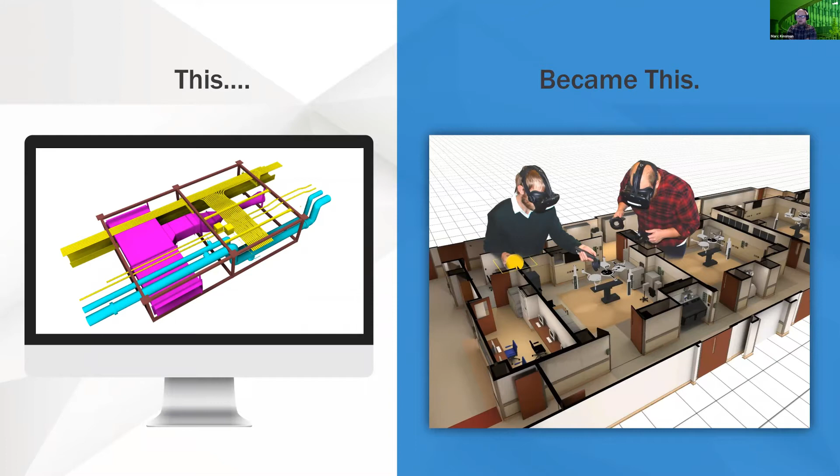Again, if we look in contrast to the old time, you could zoom around, you could fly around, sure. But many times I'd find myself looking in there and I'd try to be routing some sort of pipe or duct or something, and say, oh well, maybe we'll be able to squeeze it through this gap between one or two other things. And the rest of the team would look at me and say, are you kidding me? Measure that, use the actual tool—and it would be a sixteenth of an inch, half an inch maybe, and I'm trying to get something much larger through there. So you lose that sense of scale. But when you're in VR and everything's true 3D, it's pretty hard to lose that, even when you're seeing it at different sizes. And it really changes the way that we perceive our virtual world, and we can get a lot of value out of that.

So what I wanted to do first, as I said, is get some of the terminology out of the way and level set here on what's big and what's important. The different types of headsets has been confusing for some people, as I might recommend something or another, or work with a project team. There's different things you can buy, and there's different things that they're good for. And there's not one that's strictly better than all the others, although I think it's getting close.

So the first one that I like to talk about is 3-degree-of-freedom headsets. These are pretty much the early VR headsets that are around. A lot of people might have seen these—the Samsung Gear VR or the Google Cardboard—and they would often use your phone, and you put it in. That 3 degree of freedom is 3 axes of rotation.

So you can look left to right, up and down, or tilt your head sometimes, and you can stay in one place but look around you, and that can be pretty useful. But if you try to do more than that, you can get pretty motion sick.

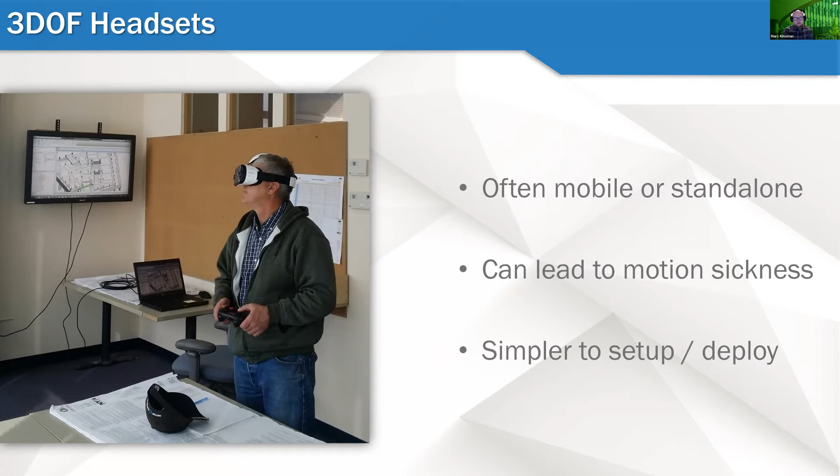But there is one technology that really works with that very well, and I never want to discount these: photospheres. A photosphere, or 360 photo, is an image taken from one location but all the way around it. You can render these or take them with cameras, and at one point you can look anywhere. That works really well with a technology that only lets you look but doesn't let you walk. It can become pretty immersive and useful. Then if you want to go somewhere else, you just have another photosphere and teleport to that location, hopping and skipping around to look at a space.

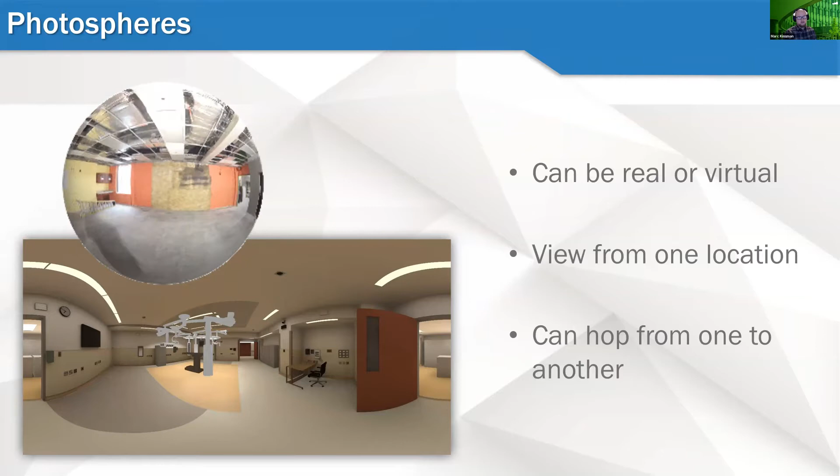It's very low tech, very easy to produce, and you can move pretty quick with these and get some good results. The next level, though, that I find a little bit more exciting for a lot of people is 6 degree of freedom headsets.

The extra 3 degrees of freedom we're adding in here are the positional ones: can we move forward and back, can we move left to right, can we move up and down, as well as all our different rotations?

For the longest time, this was pretty much PC based. You'd have to have a really powerful PC, lots of cables and cords, but more stuff's coming out right now, like the Oculus Quest, that while less powerful, can still do a lot of the 6 degree of freedom things.

Within that, you're also going to typically have some controllers, so you can see where your hands are as well as move your head around. It's a very immersive tool.

We're kind of striding in 2 ways to do this right now. The first way one might use a 6 degree of freedom headset, especially in the construction industry, is to use what I call a one-click solution. There's a couple different ones out there, like Iris VR, the Wild, but the idea is you might be in Revit or some other authoring tool, you click one button and all of a sudden you can put on your VR headset and look around, explore a little bit. Typically these are software as a service, so you have to pay for them, and you can move around, and they do offer a good sense of presence.

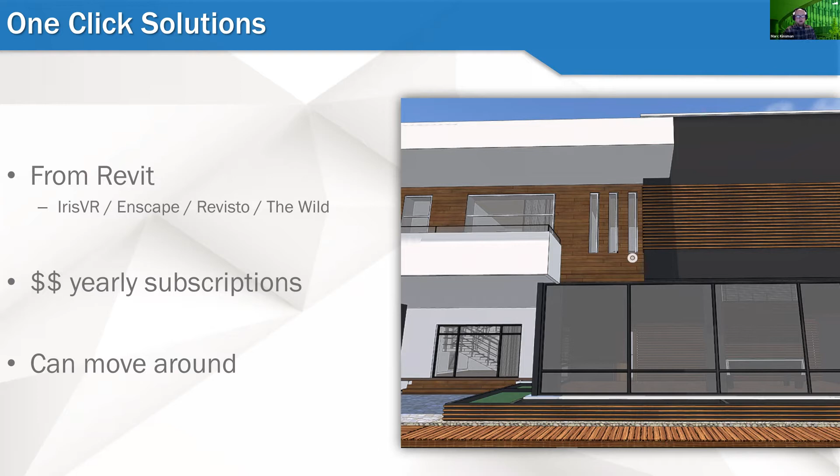Now, it's not going to be super high fidelity in most cases because it's just taking what you have in Revit, and it might not be able to handle a lot, but it's a really easy way to get in and a really good way to work with your teams, your owners, your designers, and figure out some problems you might have.

If you find those to be too limiting, you also have the option of going to a game engine, building it full from scratch. That's what my department does, that's kind of how we got ourselves started. The reason for this is absolutely anything's possible. You're making a video game from the ground up, but it takes a lot of skills, a lot of programming effort, a lot of good modeling effort.

It's a very different style of modeling than we do in the construction industry. It's mesh modeling as opposed to CAD modeling. But the results are amazing, and you can do some really cool stuff. We'll talk about some of those later and what I've been working on with that.

So there's 2 categories of augmented reality. There's video see-through AR, the type you're going to have on your phone. You're going to look at your phone, see through the camera of your phone. It's going to be some sort of video mode, and then you're going to layer things on top of that. There's a bunch of different ways to do it, and it can be pretty easy, but also doesn't always feel that immersive because you're really looking at a video, and how do you tell that that's any different than if someone just took a video of something and edited it? What makes that realistic and real time?

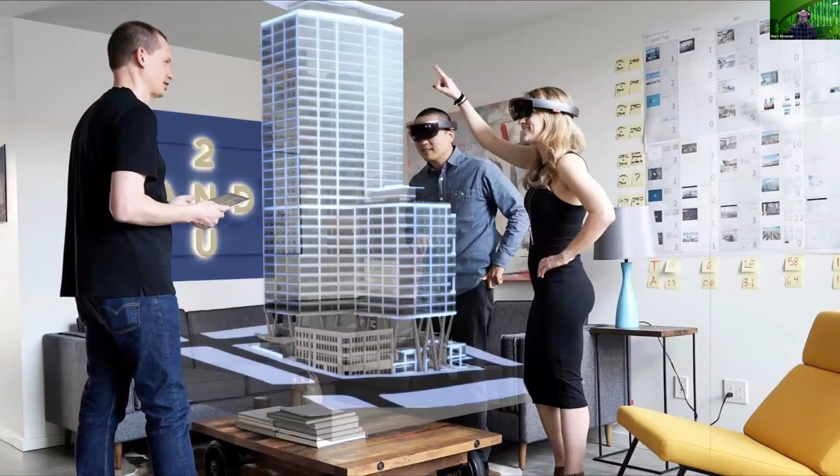But lately, we've kind of moved more towards this. I do have to give a call out - this image was made by Skanska and Studio 216, so I'm just borrowing it from them. But I think it really does set the vision for what the use of this technology can be, especially when you're starting to play with AR.

It's this normal environment - you might be talking about something, but you need to look a little bit more in depth into the models. You need to be able to jump in there in some way, and you can just bring it up and work through it. This leads to this gradual paradigm shift I've been seeing in the industry in the uses of extended reality.

When it first came out, everyone was really excited, of course, but the actual use cases were pretty thin. Almost all of them were architectural visualization - can we bring someone in to walk around and look around? It'd be very neat, pretty inspiring to see stuff. It could be at different levels of fidelity, but ultimately not super useful or at least reusable. Someone will go in and say, oh, now I understand the space, cool, and I'm gonna dip out of here because I have other stuff to do. So you get that sense of presence of standing there, but once you get that, there's not really much value from repeating that.

Where we're seeing the industry start to move, and some of the vendors and more advanced practitioners, is towards a collaboration movement. So it's more than just, hey, can I move an object around, but really, can I get multiple people in the same space working together, having these important deep conversations, being able to facilitate those conversations, other tools and abilities for that, and really having that space respond to multiple people in there doing the work that they need to do. This has been pretty exciting as an idea, and I think I'm going to use a bit of this as a jumping point to show the history of what I've done with VR and how that's influenced things. But just always be thinking, if you're going to start to use VR or AR or talk about something with it, what are the use cases? Is it just a cool, neat tool to look at stuff, or can you do more with it?

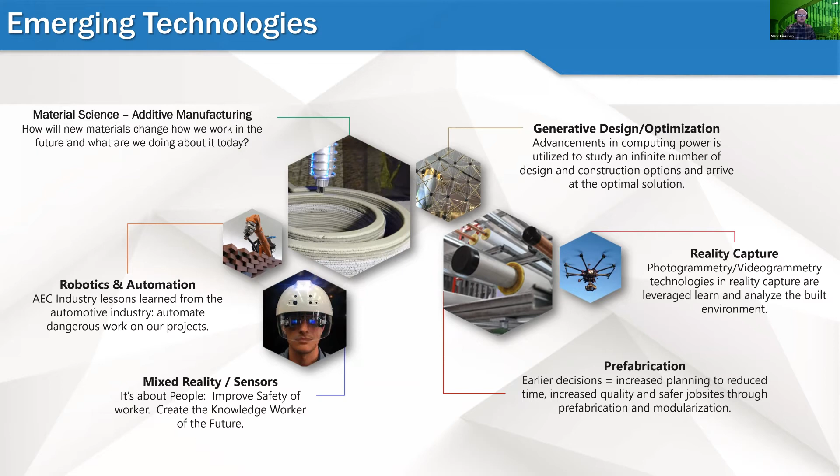But I'm just going to jump straight into some actual concrete examples of what we've done with these tools, and a bit of how that's evolved over time, just to give people ideas, because I think we often get stuck in, well, I can use this to look at it, but what are further tools? How could I use this to make money? How can I use this to make decisions?

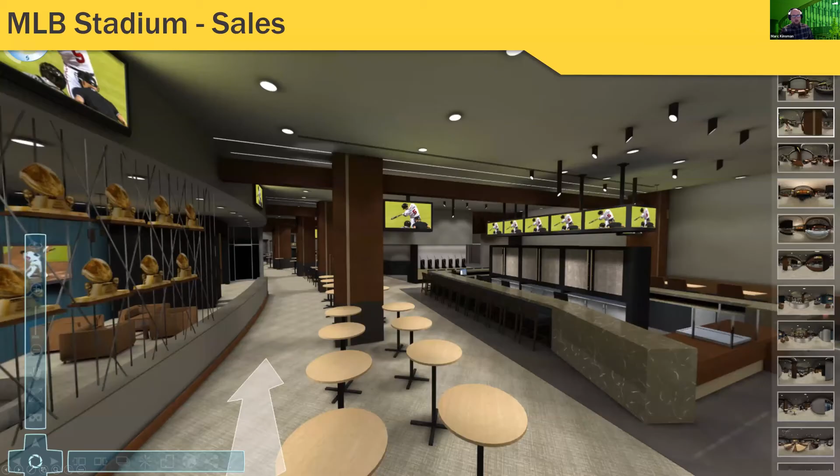So very early on in our career with this, we did some stuff with 360 photos. As I said, that was kind of that early stage where you can look around and start to see things, and then teleport to different areas. So we worked with some Major League Baseball stadiums and helped them build a tool that they could use in their sales centers to try to sell these suite spaces early. It worked pretty well - people were pretty excited about it.

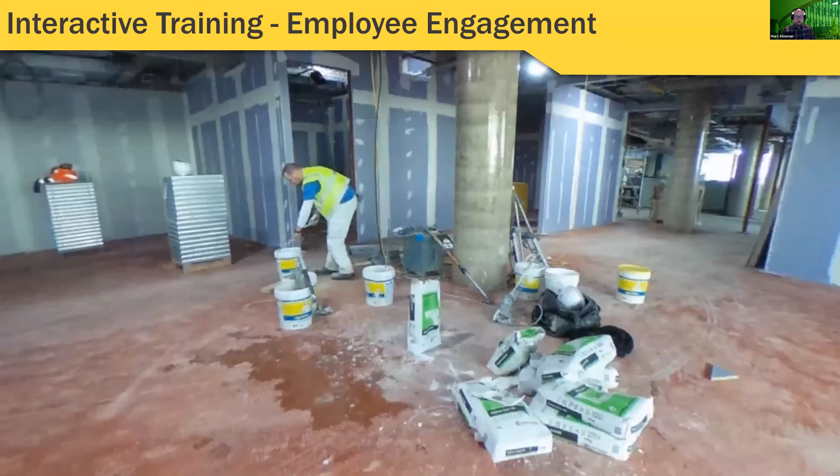But then we turned inward and started looking at how we might use that on our own job sites. So we developed a safety tool where we were asked to identify job site hazards. The goal here is, yes, it's easy for someone to use the tool, but more importantly, it's easy to create these new quizzes and tests. We actually have a web-based portion as well to create these, so it's very easy to jump in, do some quick learning on something, and then move on to the next step. I think this is going to show our little platform for creating new quizzes.

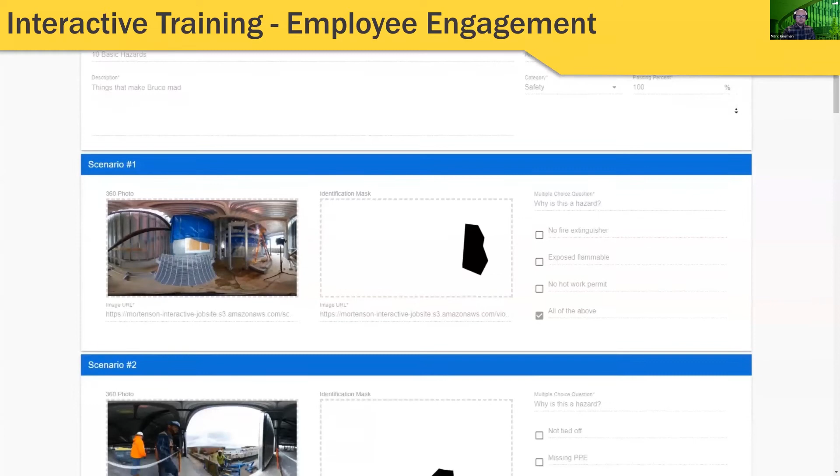And so this is more recent. As I said, we don't want to forget that 360 photos and 3 degree of freedom headsets are out there. They can be used, but it's a very specific use case that you want to have.

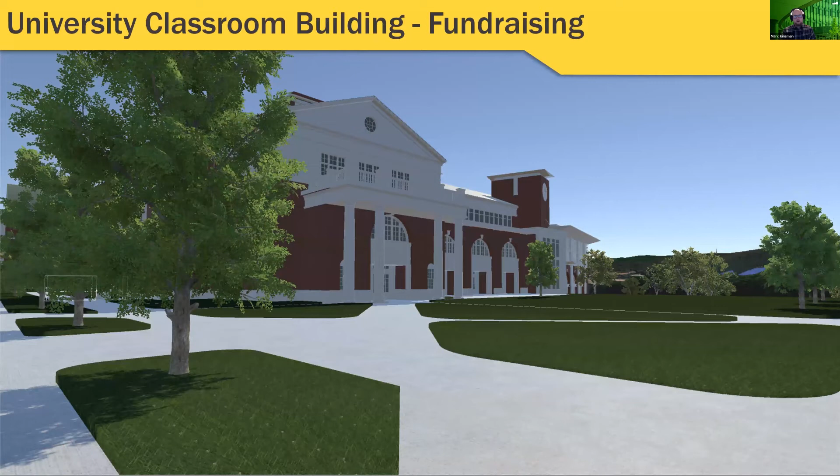Some of the things that are probably more similar to one-click, we haven't really done too much recently, but this is kind of the level of fidelity you might be able to see in most one-click solutions. And even with that, you could use it for different things. So we've worked with a university at one point and took some of the early models in there, brought them into VR really quickly, and they used that for fundraising. They actually would bring that to potential donors and say, hey, how neat is this building? Wouldn't it be cool if that building had your name on the front of it? And it only takes X amount of dollars to make that happen. So that's been a pretty valuable tool.

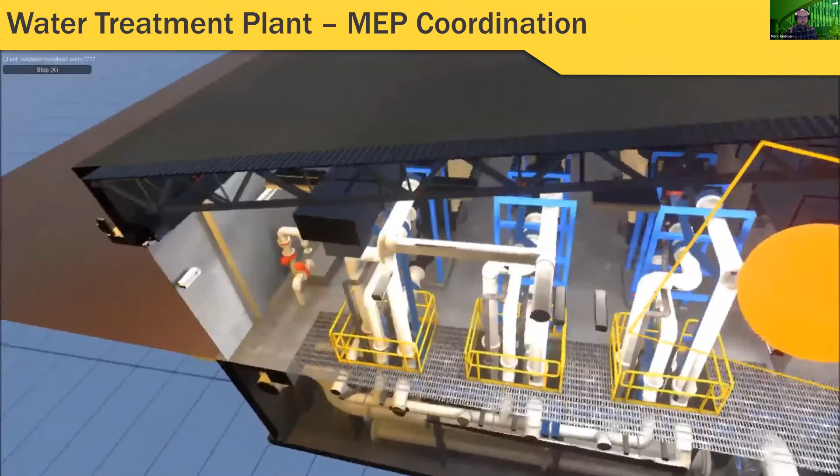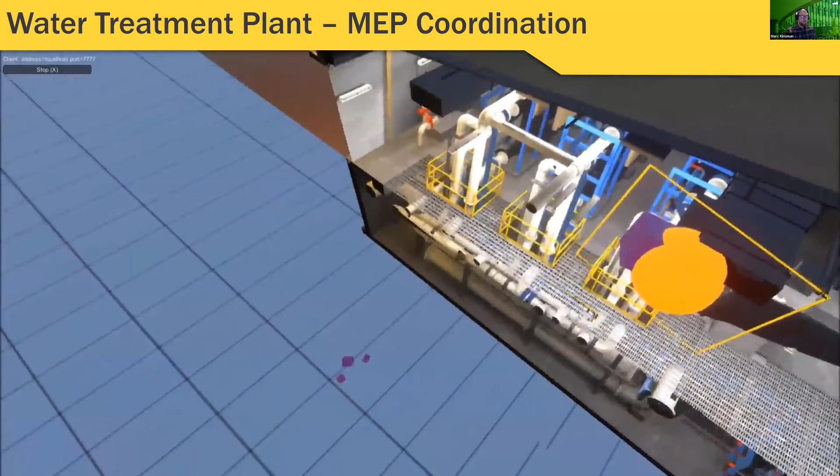This one's a little bit more basic, but it's on the other side of the building spectrum than we've been talking about recently, which is working with facilities. How with facilities can you get them in ahead of time? Can you get them to understand their new space? There's this huge pressure once a building's coming online to start doing your maintenance early, your preventative checks and all that. So going through and familiarizing the team with that, getting them to understand how things flow, tracking down different systems, looking at valve locations - this is a really easy way to do that. Right now, a lot of teams would probably be using something like Navisworks, but it's just a different experience when you can actually have the user stand in it and see how they feel with it.

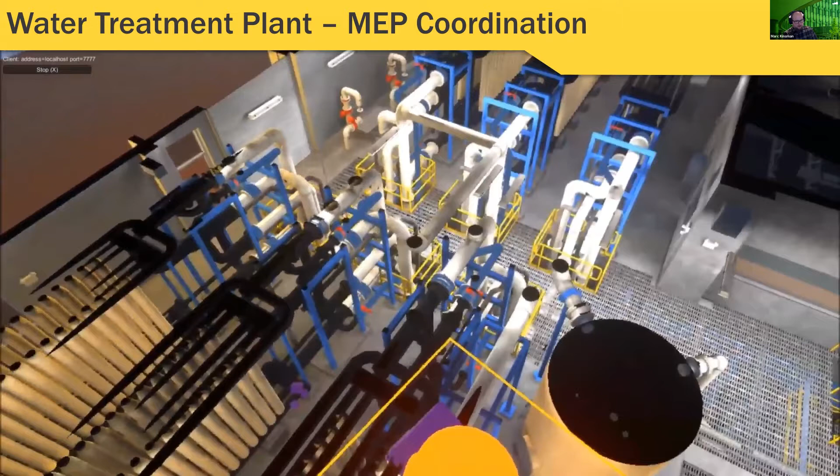I'm going to try to speed up a little bit with some of these because I don't want it to get too repetitive.

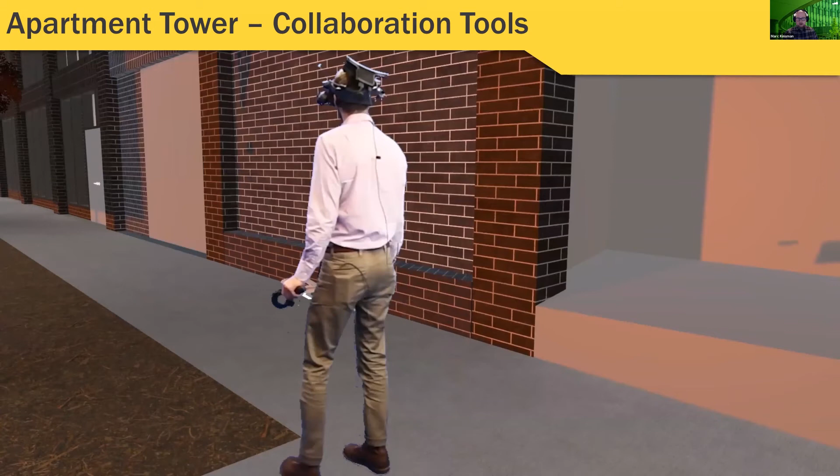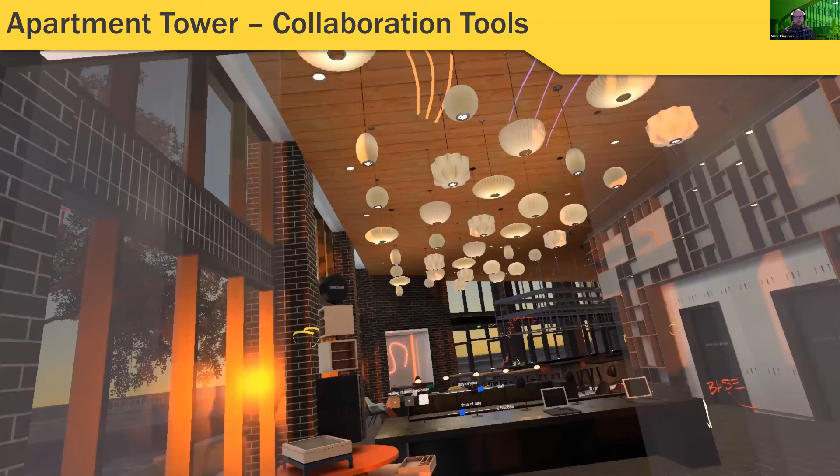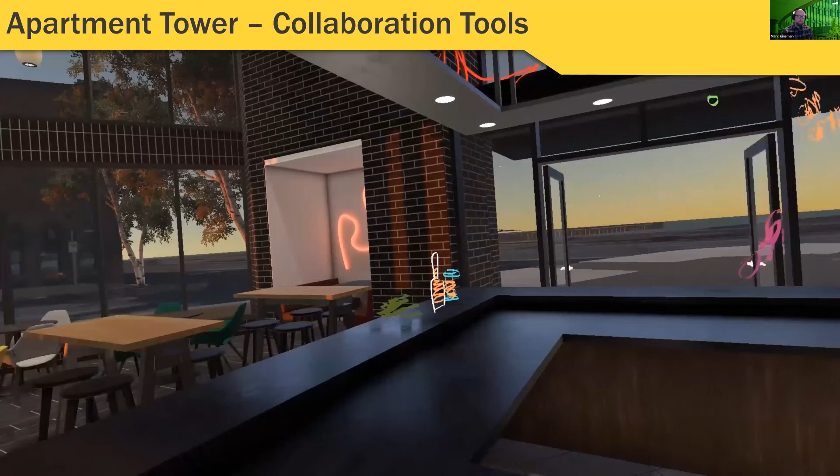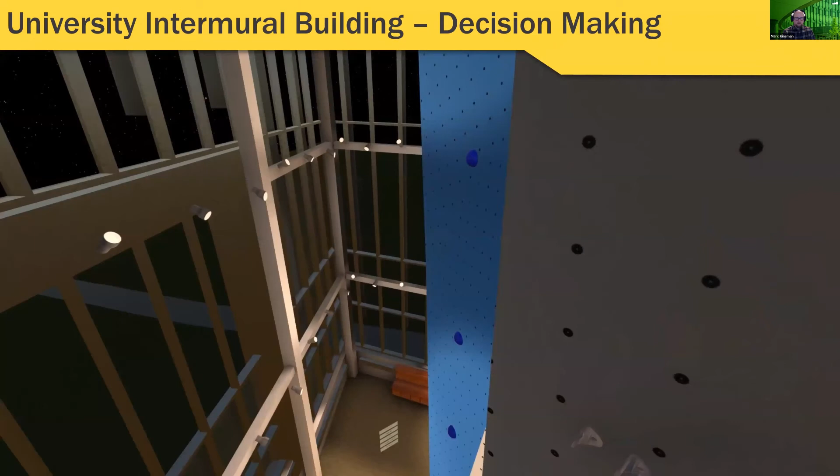Another project for a university, that's kind of a core of what a lot of Mortenson does. For this project, the goal was to make some decisions, and the reason I like to keep this one is to tell a bit more of a story. This is a story of classic rendering versus immersive spaces. There's a bunch of glazing right near this rock climbing wall. This was for Penn State University, and they're building this new intramural center. That was one of the focal pieces - that big climbing wall, especially when it was dark out and all lit up. How does that look? That color scheme was an important piece of the design. There were some renderings made of different coloring options, and the team made a choice.

But I think ultimately our project manager felt like that wasn't going to be the right one, and so asked us to do this quick VR exercise where you could swap between those options. Come to find out, once those decision makers were able to move around more, explore, and see it from more angles than just a couple renders, they ended up changing their mind. They thought they liked one style, and then they ended up going for another. Because we did it in VR, we were able to do it early enough and make those changes with really no cost impact.

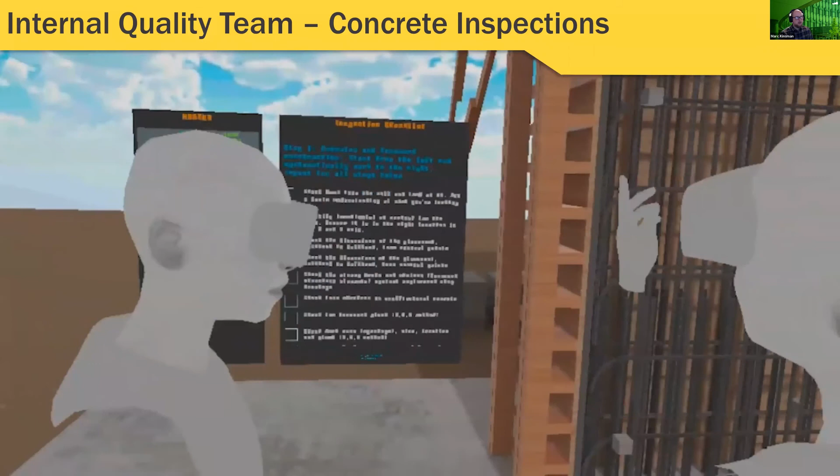As far as training goes, this is one that we've been working on internally, and it's for concrete inspections. So it's more generalized, but it teaches our process. It goes through and says, okay, what are you going to do first? How are you going to figure out things? It has a bunch of those different components to teach our new engineers.

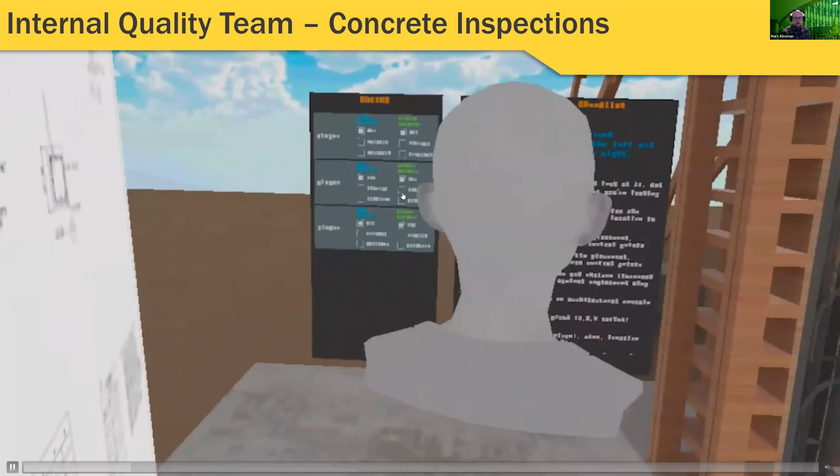And the reason why we started to go after this was it's not always that you have that perfect place to teach, or your teacher's not going to be ready at that time. So how can we make that a little bit easier for having anybody around the country be able to teach anybody in kind of a standardized way?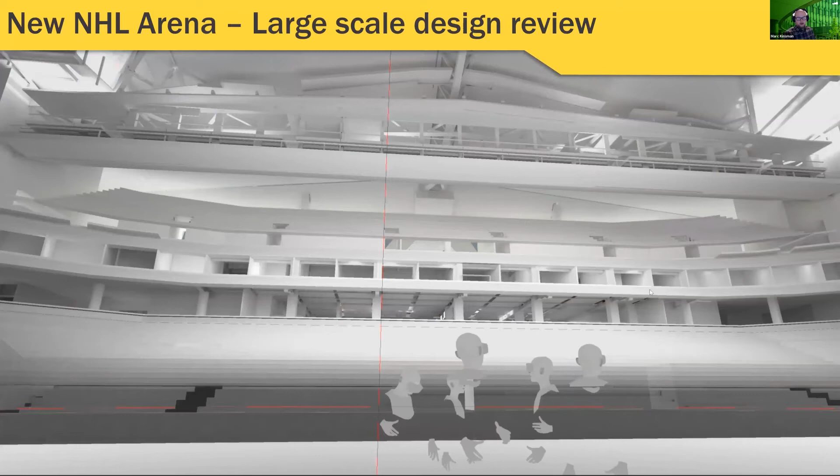And this is using, or making heavy use of, a new kind of technology that we've been working on, and actually started working on with an arena that we're building in Seattle, a new NHL arena.

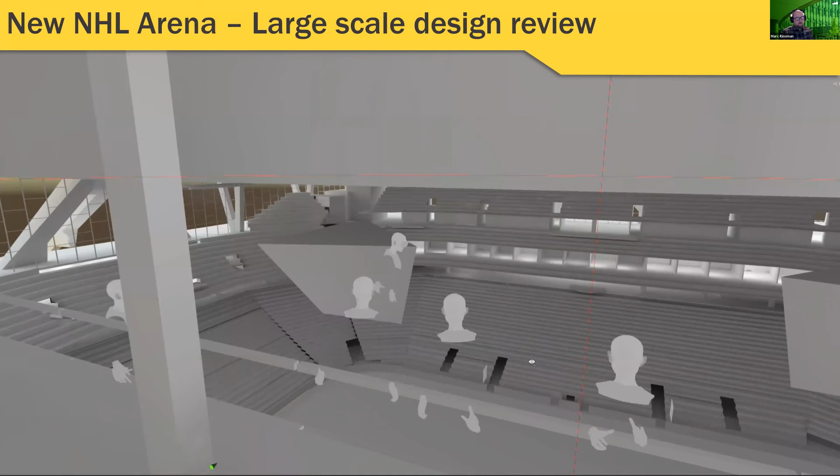And what we did here, I mentioned a little bit ago, the Oculus Quest, and we're quite enamored with that device. It does a lot of things really well. The big piece being it's quite cheap to implement. It is standalone in that you don't need a computer for it, but still has 6 degrees of freedom. And so it does all of its own tracking in an inside-out method with cameras built into the device.

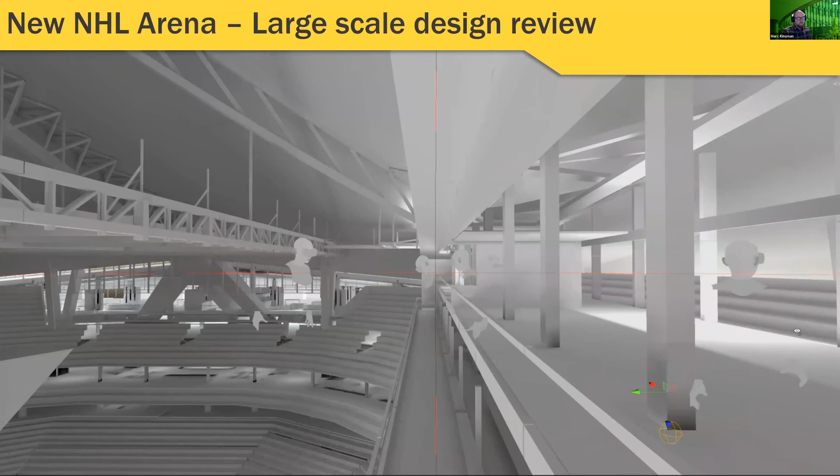You can actually turn off the Guardian system, the safety system on it. And we've been working in a space that's probably about 100 feet by 50 feet. So you can really open up the size of what you're doing in VR.

And then we've written some special code to co-locate all of the people who are in that space together. So the real world is aligned with the virtual world. And so as they walk around and talk through things and point at things, they can kind of all do that in a group and together.

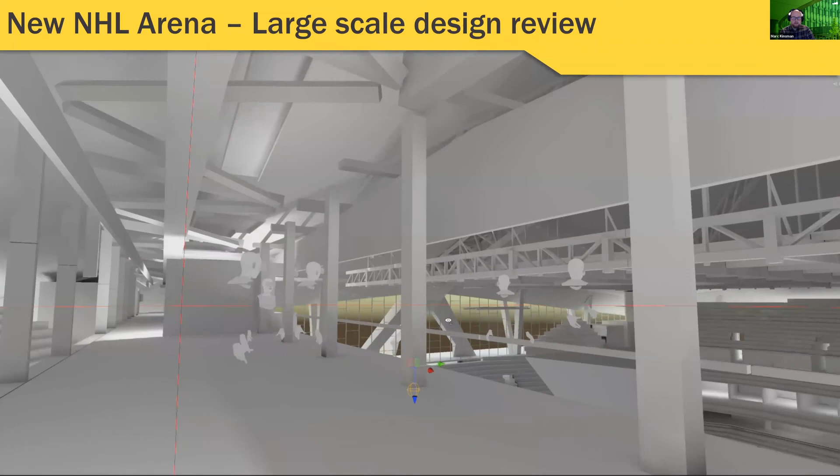And this has really changed the way we've seen a lot of these experiences. Before, it's been, we'll get someone in there, they'll stay in for maybe 5 minutes, they'll look around real quick, they'll take off the headset and pass it to someone else. And, oh, okay, I don't need to do that anymore, I've kind of seen it.

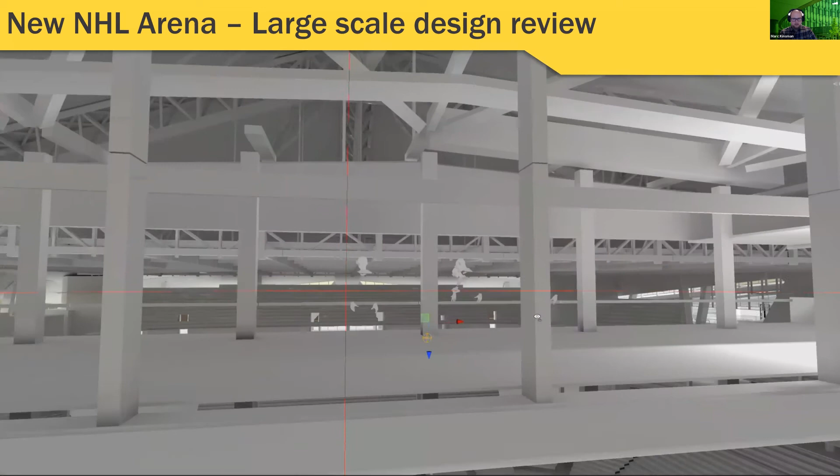In this case now, when it's this simple and this easy to set up, and you can tell it's not even that high fidelity. The later versions of this, we've added in color and everything as we've progressed through the design process. We have people who will jump in there for their first time and spend an hour with the group talking through everything until the meeting's over, and then they're like, oh, do I really have to take the headset off? We've had a couple key personnel on the job site from the owner side who have probably spent in excess of 20 hours in the virtual reality environment, touring other people through, having these conversations.

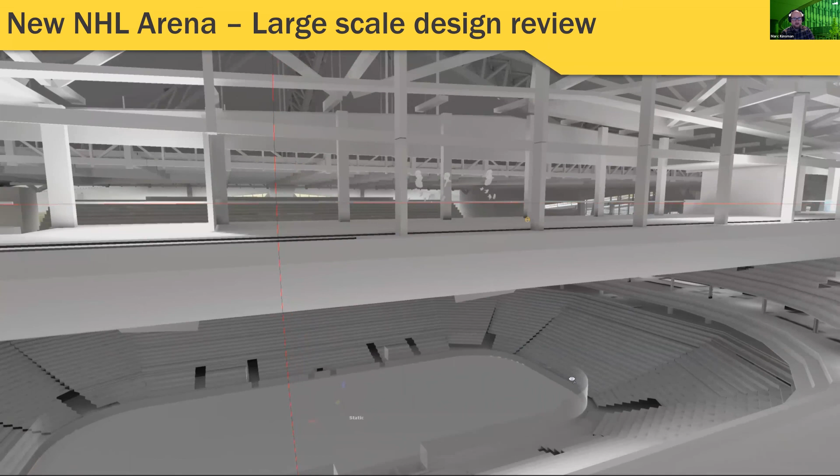And so it's been a very powerful tool, and it's a very subtle shift of kind of what the goal is in that collaboration and making sure it was easy and smooth to have multiple people in the environment working together at the same time. And so this is probably where most of our research and our time has been spent lately, is how do we make this better? How do we make it easier and kind of keep going with these large scale collaborative sessions?

Almost to the end now. I've been talking about VR this whole time. And so maybe it's time to talk a little bit about AR and how you might see that play out in a construction site. And I don't have as many examples of this. We've played with it a little bit, and we've seen some of the possibilities, and mostly we're just kind of in a waiting pattern.